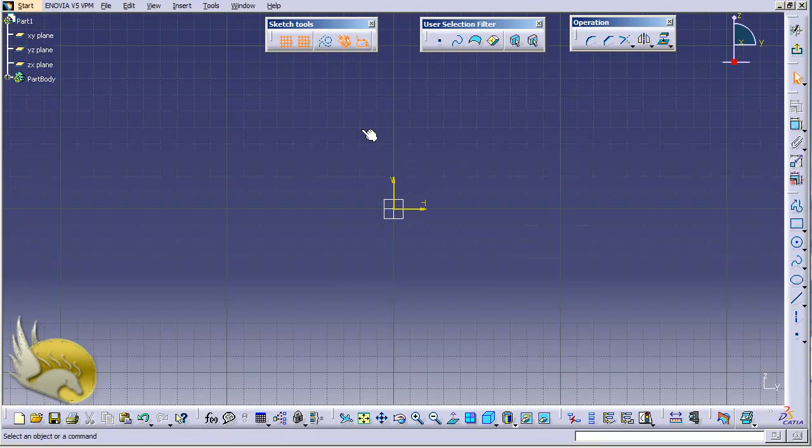Now in this section I want to talk about corners and chamfers and how you can add this to your profile. So I go to, for example, YZ plane and click on sketch, and now I am aligned to YZ plane. I select a very simple rectangle and draw it here. Now you can see I have 4 lines available.

I deselect this and I go to operation toolset, or I can go to insert operations and select corner from here. Whenever I selected this, I should select 2 lines that are adjacent to each other. So I want to select this one and this one. You can see the third click will determine where the corner is going to be placed. I want to place it right here.

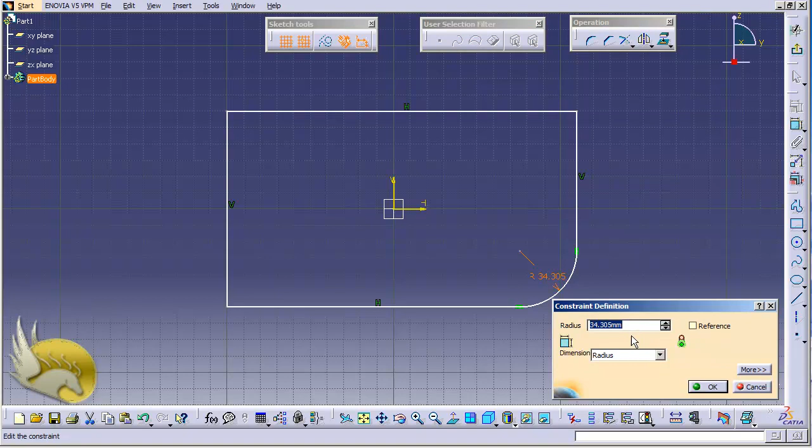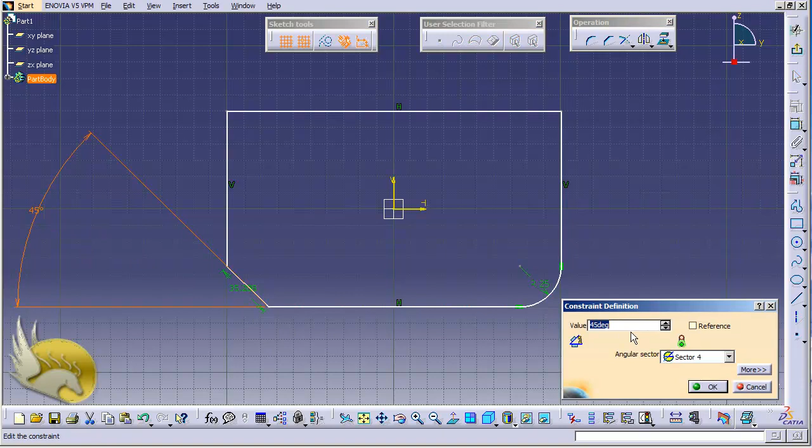Now the next thing is adding a chamfer. Again, like corner, we can add a chamfer by selecting one line, the adjacent line to the first line, and you can see that I can press the mouse button to place my chamfer at any place. So I click here and now you can see that there is a 45-degree angle by default added to my shape. I can change this degree at any time. For example, I want to have it 30 degrees, so I decide to change it, and I want to make this a little bit smaller.

And of course, you can see another constraint here, and that's the size of the line that is used to create the chamfer. I want to make it about 20 millimeters, so I type in 20 and hit enter, and you can see that this changes the chamfer to your desire. Now I have more tools available here. I press Ctrl and left arrow key to pan to left.

And now I want to show you how you can mirror something. Here in operation toolbar, again, going to insert and operations will show you the operation toolbar. You can see that we have transformation set, and mirror is one of these, symmetry is the other, and these are the things that you can use to mirror something.

I want to have an axis here, so I go to operations, to profile, and click on axis. This axis is not going to be used to create any shape. It is just an axis and it is going to be used as a reference line. So I click to have axis here, for example. And now that I have created this axis, I want to add another profile here.

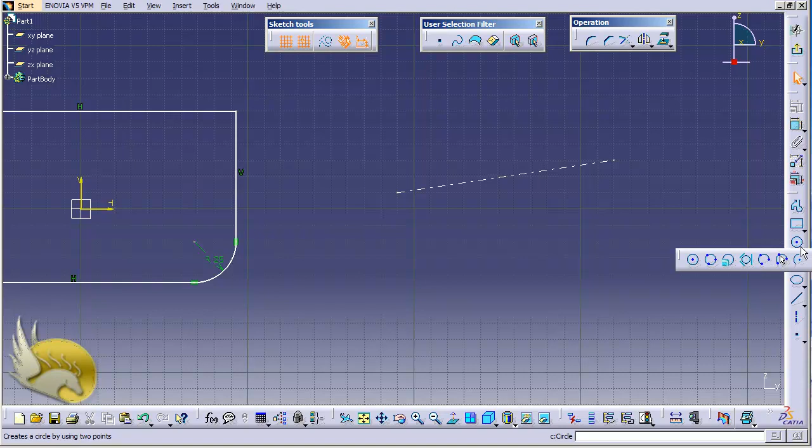For example, I want to have an arc. For this, I go under circle and select, for example, simple arc here. So I click here for the first point and I go here for the first endpoint, and now I have this here for the second endpoint. So I have this arc here. Now this is selected. I go to operations and go to transformation and select mirror.

Now the only thing that I need to select is the axis of mirroring, and this is the axis that I want to select, and you can see that the mirror of this line is created in the opposite side of the axis. Now you don't need to have an axis for this. I can use any line to mirror.

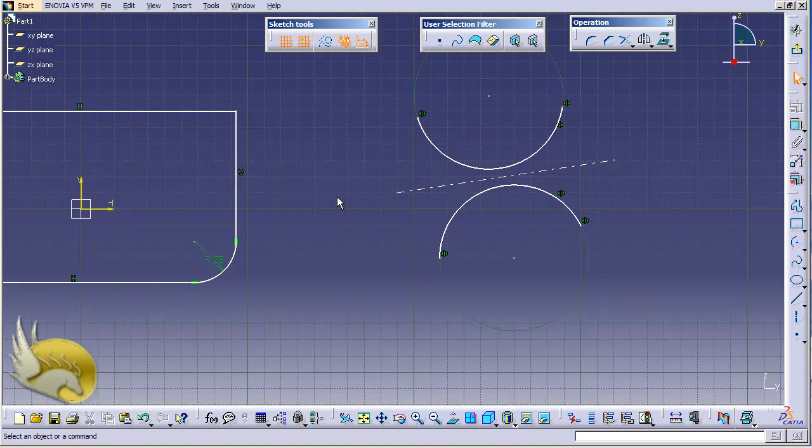For example, I press Ctrl key and right arrow key to pan to the right, and I select this whole thing using marquee selection. And you can see that everything is selected here. I go and select the mirror tool, and now the axis is gonna be selected. I prefer to have this line as my axis. You can see that this line is not gonna be selected because this is selected previously.

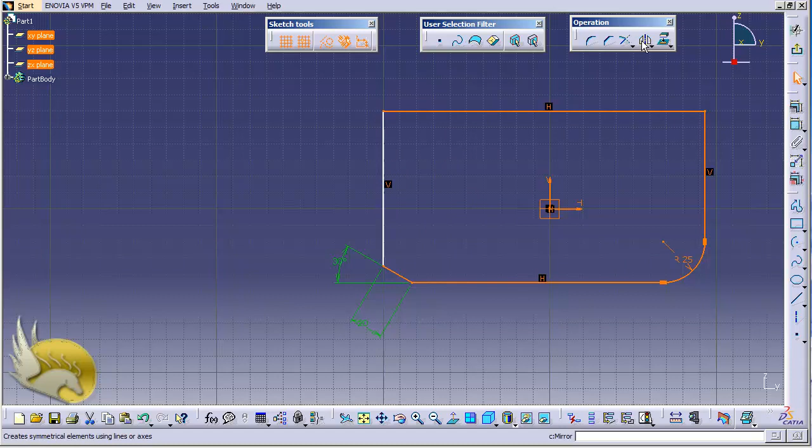So I click in a blank area, I hit escape to get out of this, and again I use the marquee selection to select everything. I press Ctrl key and click on this, so this is gonna be deselected. So I have everything selected except this line. I go to mirror, click on this, and now the only thing that I need to select is the axis. So I can select this.

You can see that whenever I click on this, there is a mirror of what I have selected in the opposite side of the shape. So this is the use of mirroring, cornering, and chamfering.